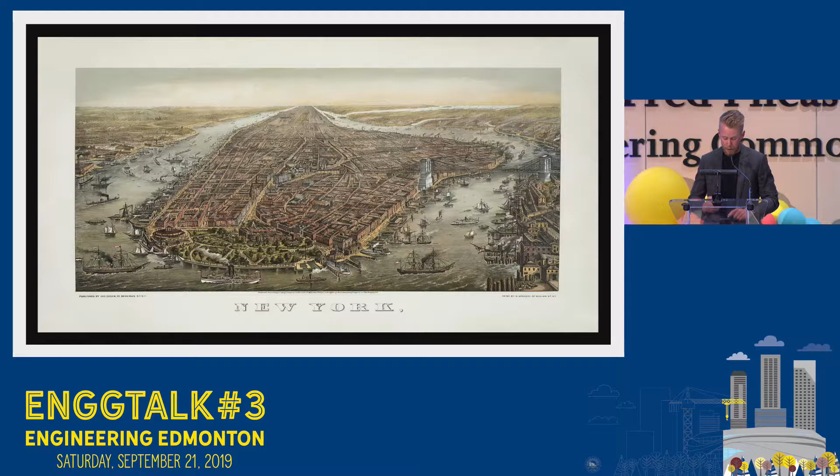Today, New York is considered the paradigm of urbanity. It became so strong because it attracted so many people throughout all its years. It is a city of creativity, a city of entrepreneurship, and it stands for freedom and cultural diversity. It invites everyone, it lets everyone come in, and people want to come in because they can start that business.

It is to remember, and was rebuilt after the destruction of the original World Trade Center complex. This is proof in New York's belief in itself and its sheer confidence. It essentially, with that one building being built, restored all of Lower Manhattan and really reinvigorated the culture within downtown and basically rebuilt the amazing city that was once crumbled.

Moving forward, I want to talk about Edmonton, the city of champions. I'm going to talk about a few different aspects of our city that I think are really important and huge in us taking that next step forward. One is our new communities - these big master plan communities and new neighborhoods around our whole city. I think they're a great aspect of our city, and they're very attractive to a lot of people.

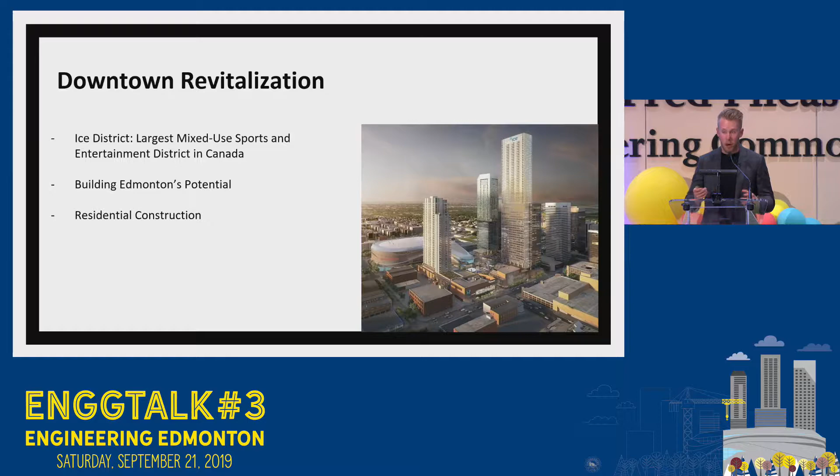A project I wanted to touch on under the downtown revitalization umbrella is this massive public plaza anticipated for the ICE district. I'm super excited for this one because it's finally a place in Edmonton where we can all, as a community, be together, interact with each other, and do basically anything. We can relax, meet each other, go for coffee. There's going to be festivals, concerts, programmable 365 days a year. It's going to be amazing.

When I went to New York City, Washington Square Park, if any of you have been there, I was very fascinated by that area because there were so many people doing so many different things, but all being with each other. Even though I was a visitor, I could feel the interaction, and I felt like I was there with everyone. I'm really hoping this is exactly what this can bring to our city, because I think it's perfect for what we need.

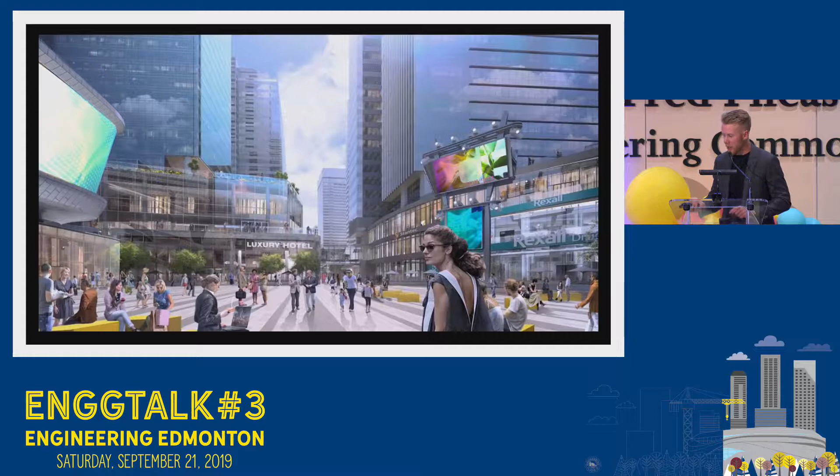Another little project I wanted to touch on — nothing set in stone, more of a concept at this time — is the High Level Line. Those of you who have been to New York, I'm sure you've walked the High Line, an urban elevated park that runs along old rail lines through the downtown core of New York. Amazing. Same idea here: a multimodal trail connecting the south and north of Edmonton.

Multimodal meaning you can take the streetcar, you can walk, you can bike, you can do everything. It's accessible to everyone — seniors, visitors, students, anyone can use it. It connects people to areas of our town that are already amazing, but makes them even more accessible and interactive. This is a prime example of innovating on urban spaces, and another example of something that could take our city to the next level.

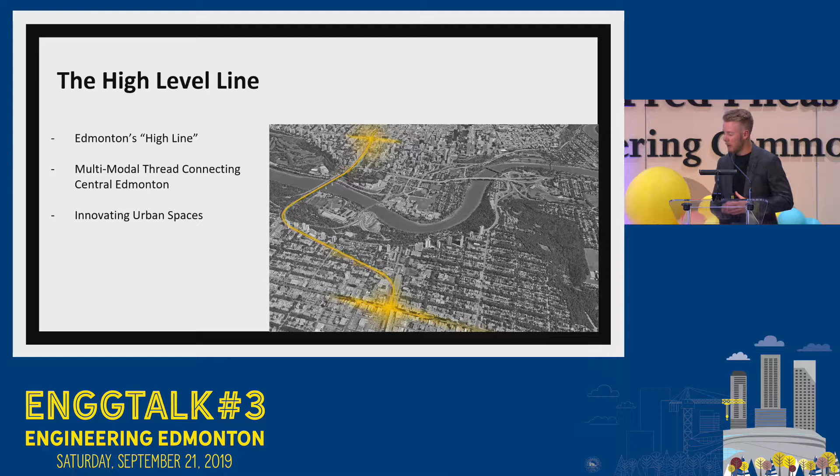So my last thought: how do cities succeed? This portion is from the book Triumph of the City. I like it because it breaks things down into two points. Number one, cities must attract smart and hardworking people — similar to how New York, when they were booming and business was moving, everyone was coming. Everyone wanted to be a part of it, and they were excited to be a part of it.

Having things like our beautiful new communities, our downtown ICE district, and cool projects we're building will attract these people toward us. That's why the engineers are so important, right? We need to build these things to attract these people.

Part number two: we need to enable them to work collaboratively. Once they're here, we have to let them engage, let them interact, let them innovate. As I said before, these are engines of innovation, and we need to let it run its process. There's no such thing as a successful city without human capital at the end of the day.

Our ability to connect with one another has been a defining characteristic of our species since day one — hunting and gathering together, sharing our kills, creating community and culture together, and learning from the past. We've always been with each other, creating things, and we need each other to innovate and make things better.

Another quote from that book, near the end, is: 'Our culture, our prosperity, and our freedom are all ultimately gifts of people living, working, and thinking together.' And this is ultimately the triumph of the city.

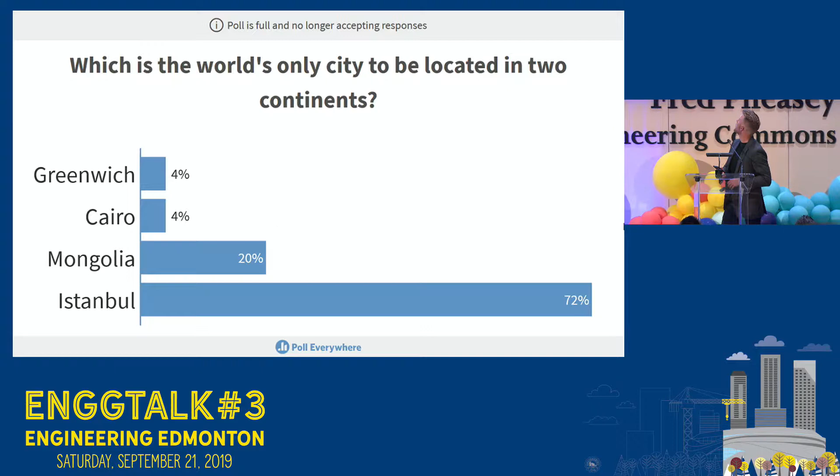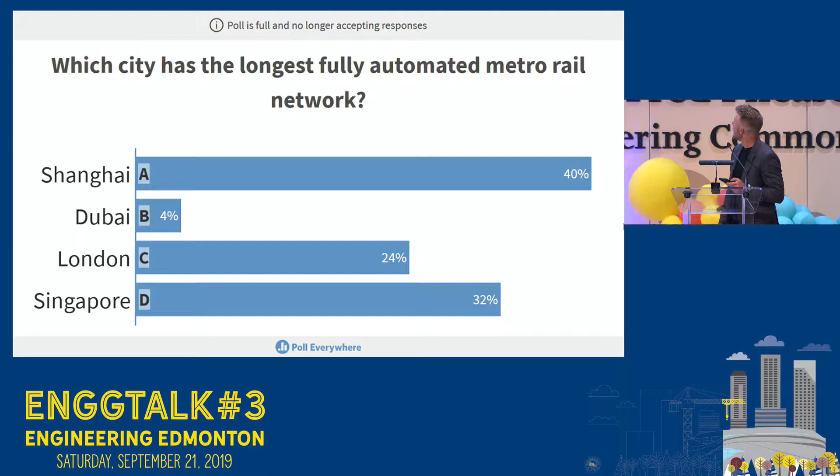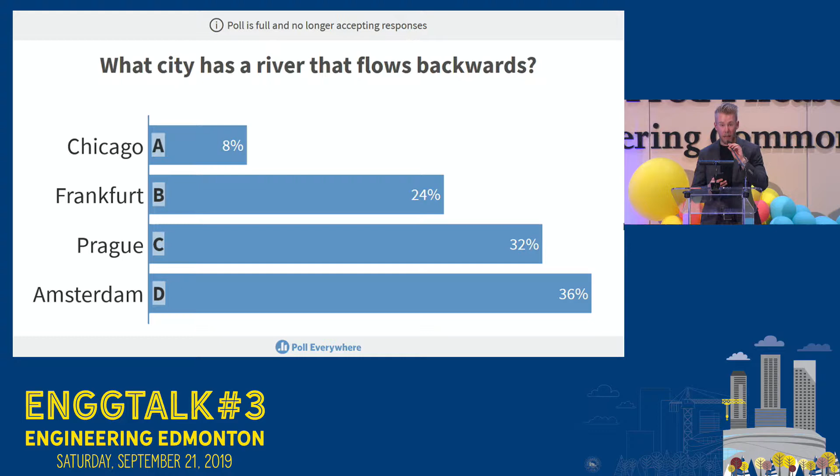Which is the world's only city located in two continents? Istanbul. Which city has the longest fully automated metro rail network? That one's Dubai, my God you guys. Which city has a river that flows backwards? That one's Chicago as well - they actually flow that river backwards to divert sewage from their water supply.

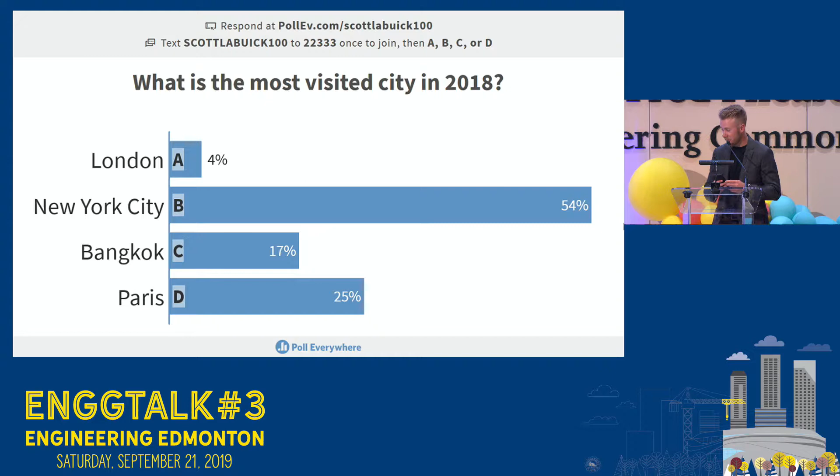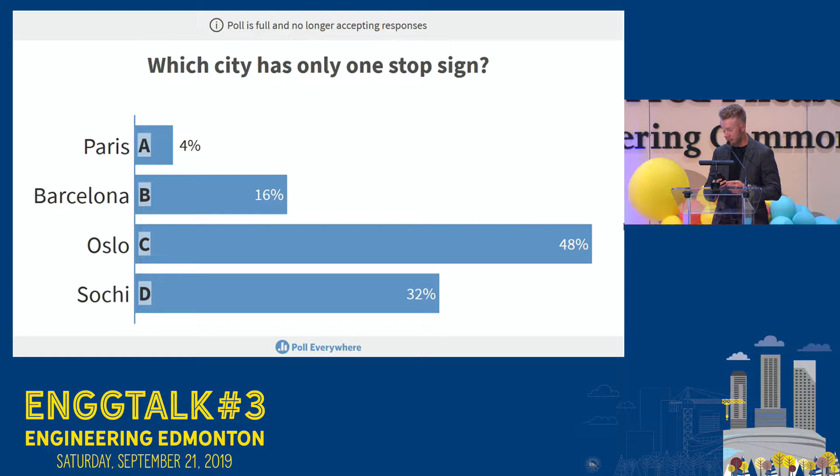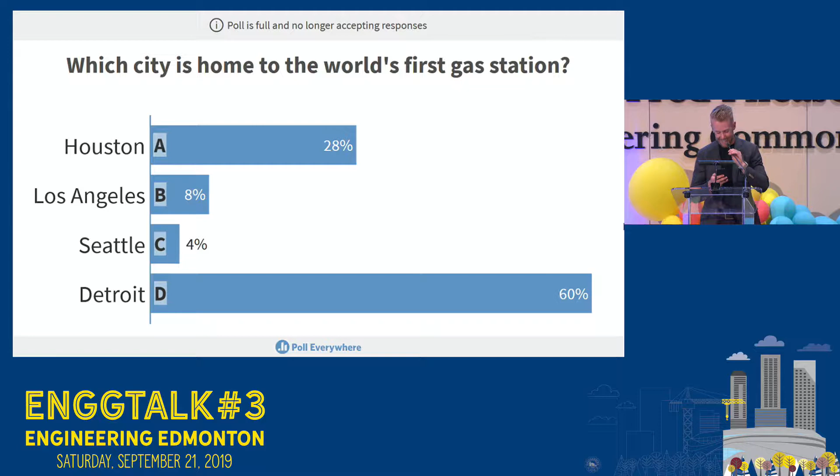Number 5, which is the most visited city in 2018? That one was Bangkok. Which city is the only one to have one stop sign? Paris - yeah, crazy stuff. Which city is home to the world's first gas station? That one's Seattle, wow, I picked great questions. This is awesome. Number 8, in which city was the World Wide Web invented?

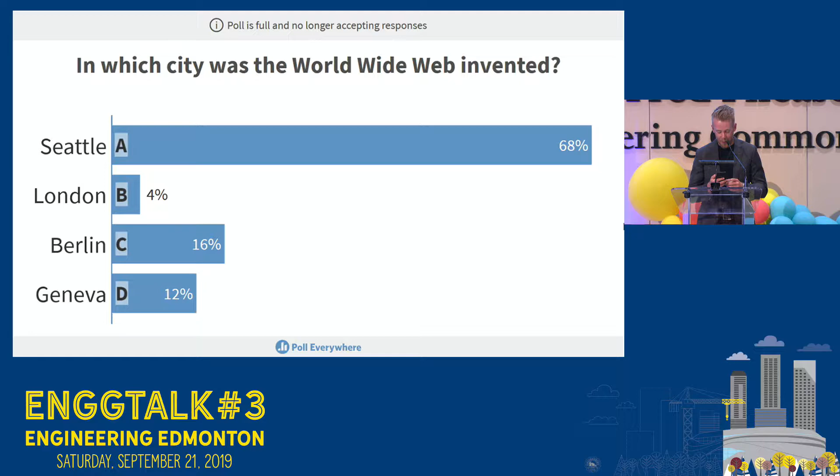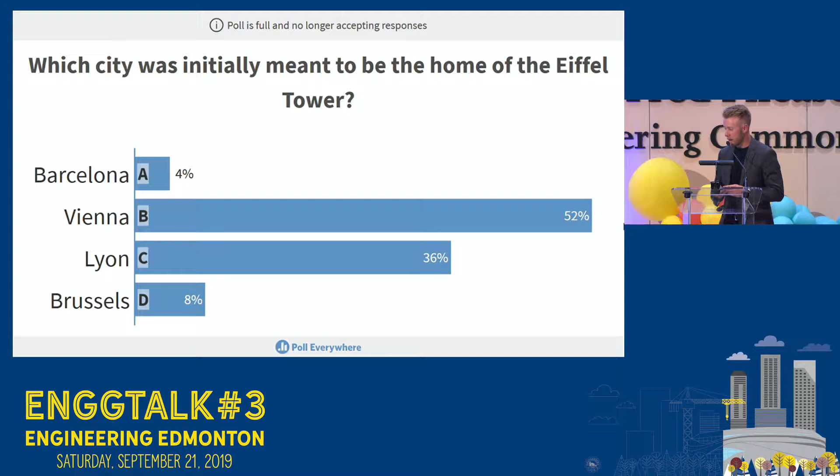That one was Geneva, yeah, I pranked you guys with the Seattle one, I knew it. Which city was meant to be the home of the Eiffel Tower? That one was Barcelona - they actually were gonna give it to Barcelona, but they didn't want it because they thought it wouldn't look good in their city. Bit crazy, I think it looks better in Paris anyways.

And number 10, which city is home to the world's highest streetcar bridge? That's Edmonton, okay, that's a good one, a good result, I'm satisfied with that. We all kind of pass. Okay, thank you guys, have a great night. Thanks for having me.

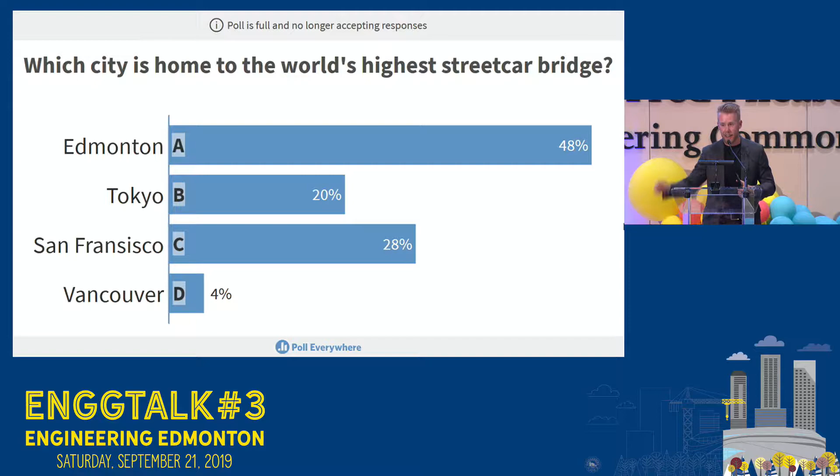Thank you so much, Scott Labuick, for coming up. I can confidently say that I know nothing about engineering, and I got all of those questions wrong. Those were very interesting and insightful ideas about the importance of cities, and it's definitely gotten me thinking.

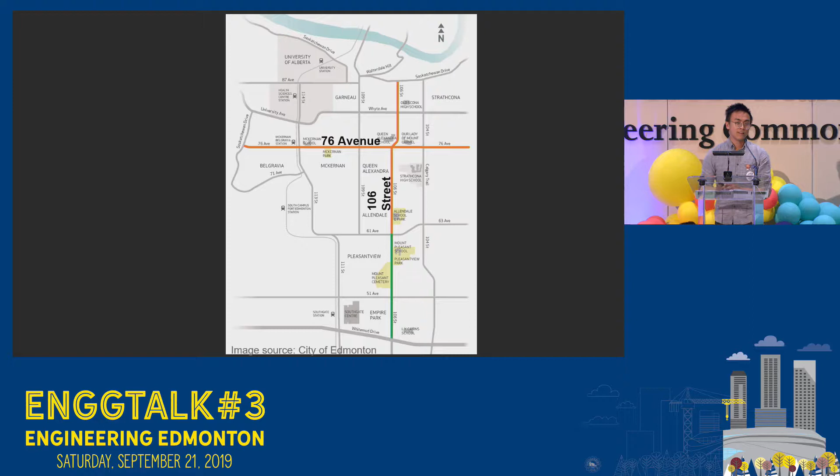We formed this project called Engage 10676. The project limit eventually got expanded to include 7 neighborhoods in total, taking a more holistic approach. We are a group of interesting people with different backgrounds—me from the city, representatives from 7 communities, people from local business organizations, and from the bicycle organization as well.

Together, we created the vision called Walk, Bike, Live. The focus of the project is to protect vulnerable road users and also to accommodate all modes of transportation.

We developed the engagement framework using a spiral process. Basically, we wanted our friends, neighbors, and parents at school to sign up as members of the project, and then asked them to share this project with their extended social network. Over 2 years, we received over 460 community members signing up for this project.

We used different kinds of engagement activities to get input, and one of the first was the online survey. We sent a survey to these community members, asking for feedback on how they walk, how they feel about walking, biking, living, taking transit, or even driving using 106th Street and 76th Avenue.

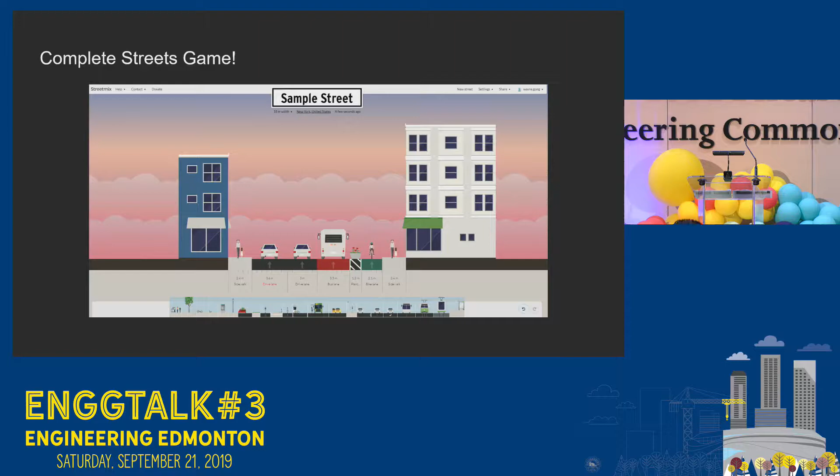I'm going to explain what we're playing here. There's a concept we call complete streets. What are complete streets? Simply, it means we design streets for all ages and abilities, no matter which mode they take.

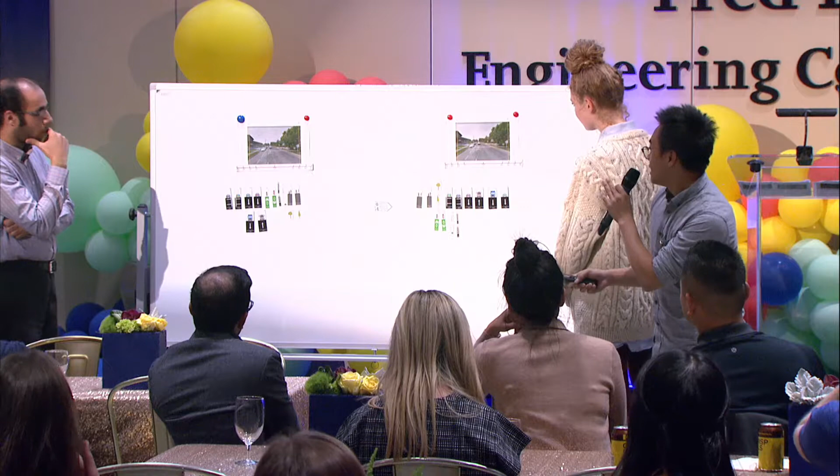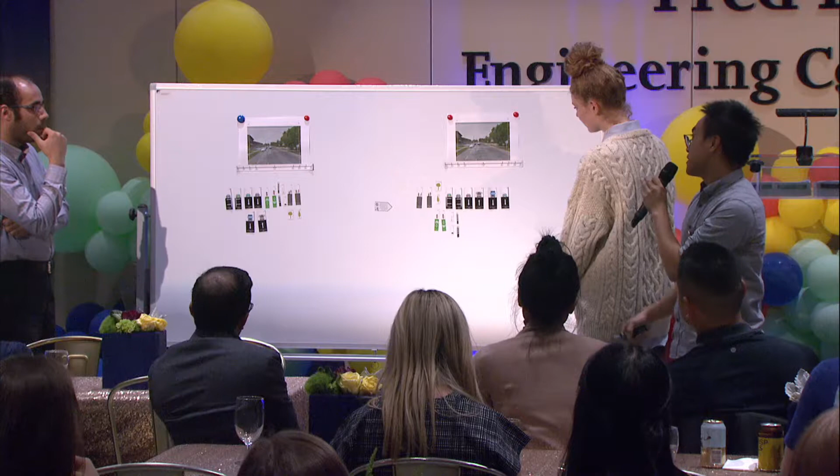Here we are seeing 2 pictures of the road cross section captured from Google Street View, from property line to property line. You will have different design street elements that you have to rearrange to achieve the vision that all modes of travel can be accommodated. You 2 have 2 minutes to finish. Go.

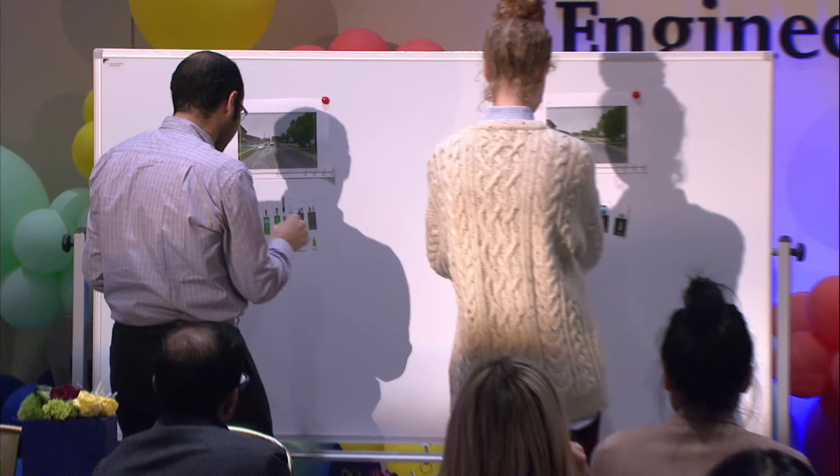Try your best to achieve the best outcome. All right, so we come back to the presentation.

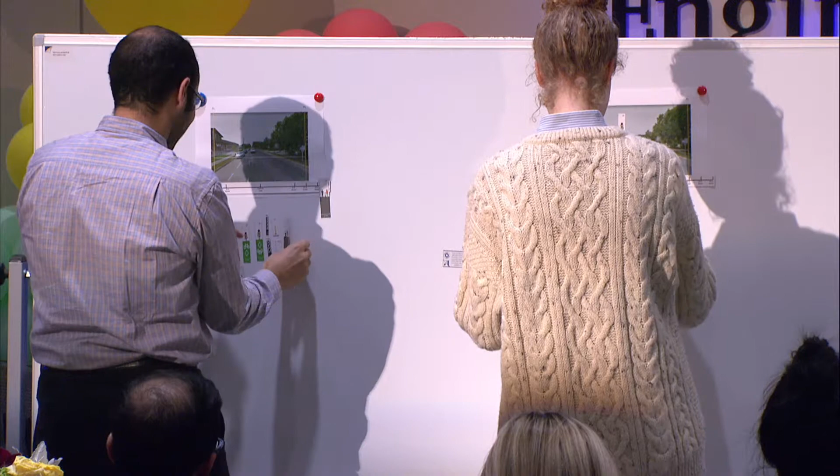All right, so while Victoria and Mustafa are solving the world-class problem, let's come back to my travel, and I'll share some of my inspiration during my trip.

And next, biking. The Netherlands is famous for biking. What I learned most is about the equity and accessibility they give to the users. No matter what background you're coming from, or what kind of physical abilities you have, there's a place in the bike route, and you can bike safely.

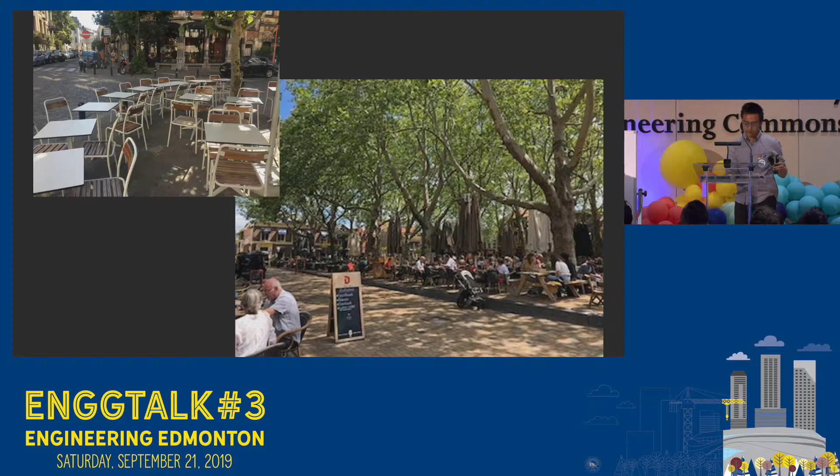This picture, what I want to highlight, is that in the Netherlands, because of their low car ownership, instead of building parking lots, they build this courtyard garden within the building plaza. This is a picture when I look out of my balcony in my B&B.

And the picture on the bottom, you can see they pay a lot of attention to streetscaping elements, like these flower beds, and also the decorated pavement surface. So the road is no longer just to move cars, but also for people to linger and enjoy.

And people tend to spend more time on the streets. In urban planning, we call these sticky streets, because they stick people.

Time's up. All right.

We weren't sure if this was supposed to line up with 20 meters. Oh yeah, the property line is from here to here, so I'm sorry. Oh, it's okay. Yeah, and there's no perfect answer, so this is to give you understanding on whatever decisions you make, there's a design trade-off. You cannot fit everything into a constrained road space. Yeah, I think you... that doesn't work. You can see.

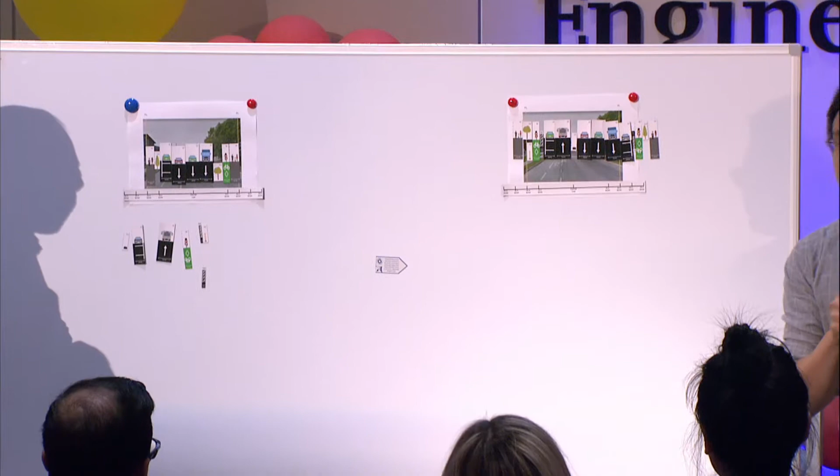Oh. Oh. Oh. Thank you.

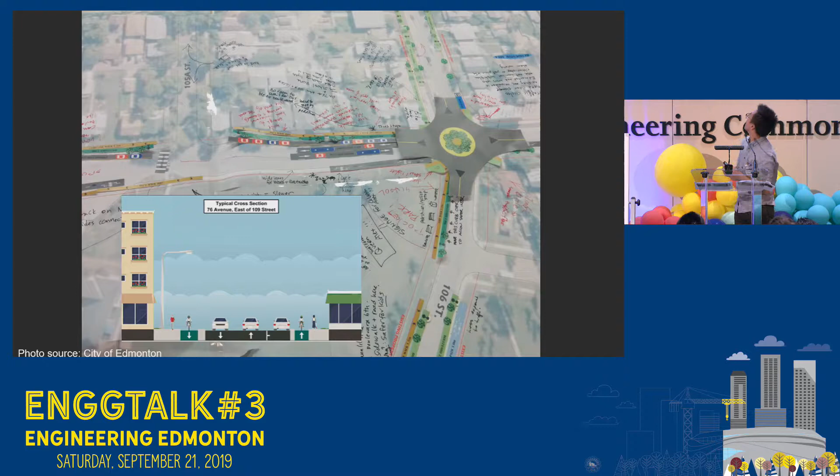Next, we refined our design and presented our preliminary design at one of the open houses. You can see there were lots of comments received, and it was identified that not enough pedestrian improvements were made in the design. That was partly because we couldn't even widen the sidewalk, because we have mature trees on one side we have to protect, and the other side has private streetscaping. We cannot just buy out people's land.

And then in the pre-construction open house, we put together a life-size cross-section highlighting how you're going to feel about this road space, how much space you will have on each mode, like bike lanes, and how wide the car lane is, so people have a better visualization of the changes coming in.

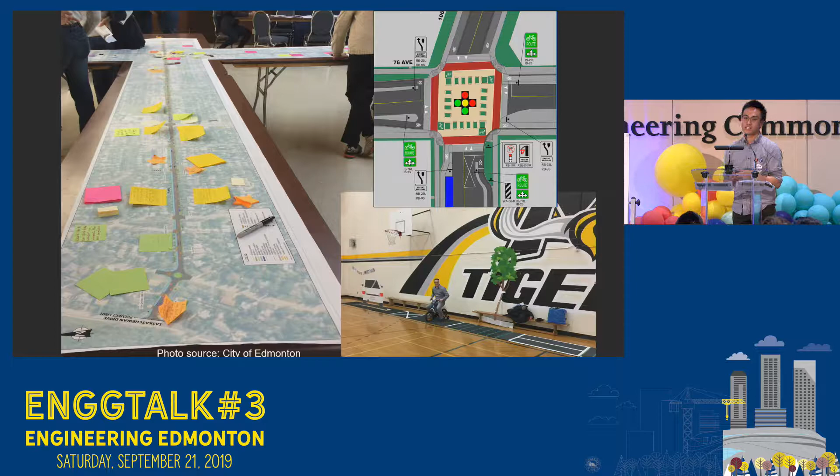And then it's construction season. There are a lot more challenges that we have to overcome, like making drainage accommodations, avoiding conflict with the underground high-pressure gas line. We also have to make sure all the local businesses have their access maintained, and we have to deal with all the detours.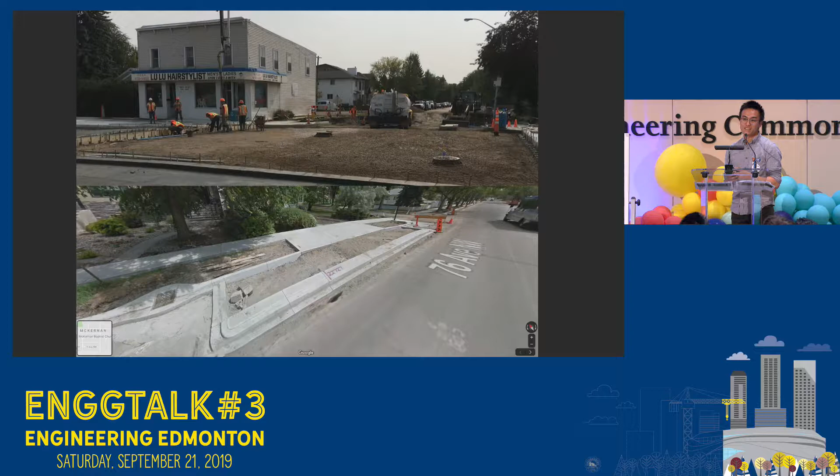Even more, we invited local residents to try out this bike lane when we had the survey stakeout. She brought her bike trailer to see, and we compared her travel path with our simulation model in the software.

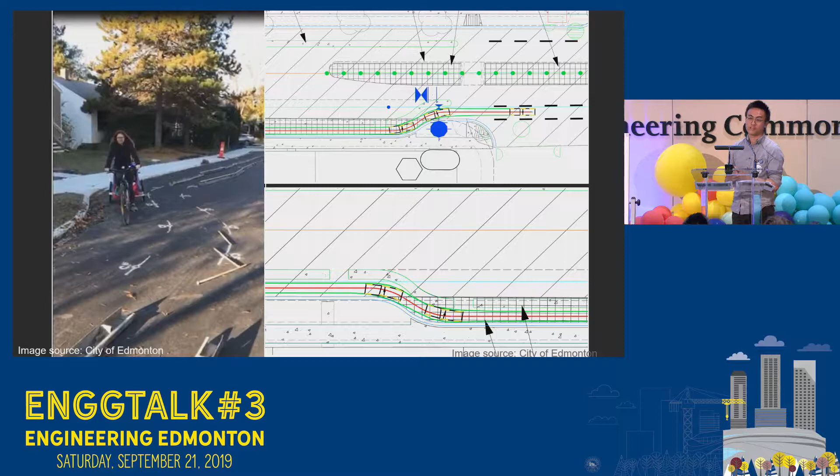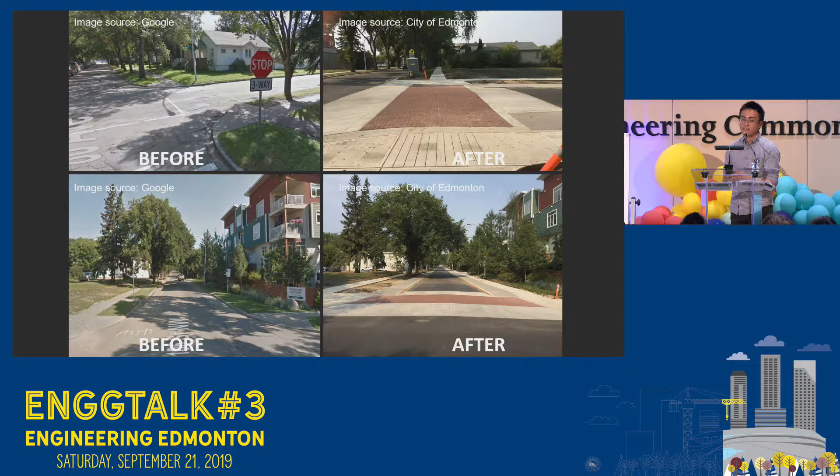And here's the final product of the construction. You can see a number of raised crosswalks are constructed, and you can find them near school areas or in areas where pedestrian traffic is high. So cars have to slow down to go over this raised crosswalk and also put the pedestrian in a more visible position. It is also aesthetically pleasing because they are decorated with paving stones.

In terms of bicycle facilities upgrade, the unprotected bike lanes now become protected with a median separation. The intersection is signalized and also has a two-phase left turn to facilitate a bike making a more safe turn.

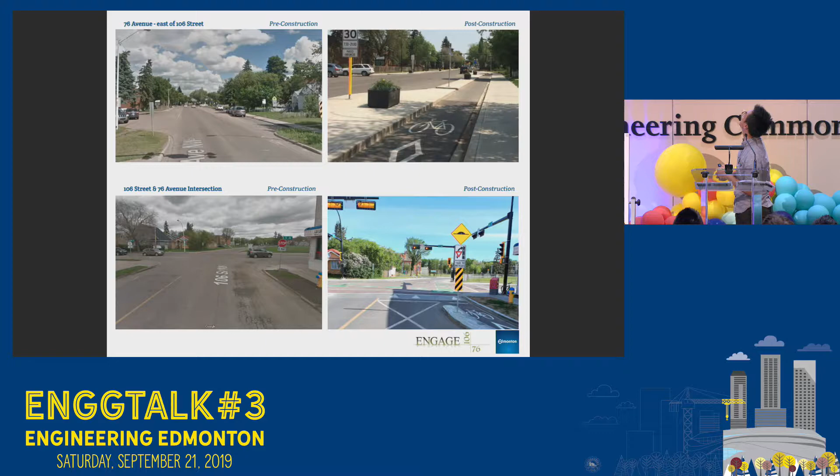We heard during engagement that parking is important to residents, especially for people with physical disability. To achieve that, we introduced a parking bay, and the protected bike lanes are deflected. This median gap not only helps the surface drainage runoff, but also improves the accessibility for people going from their car to the sidewalk, because the obstacle is removed.

And you can see it works like a charm in winter.

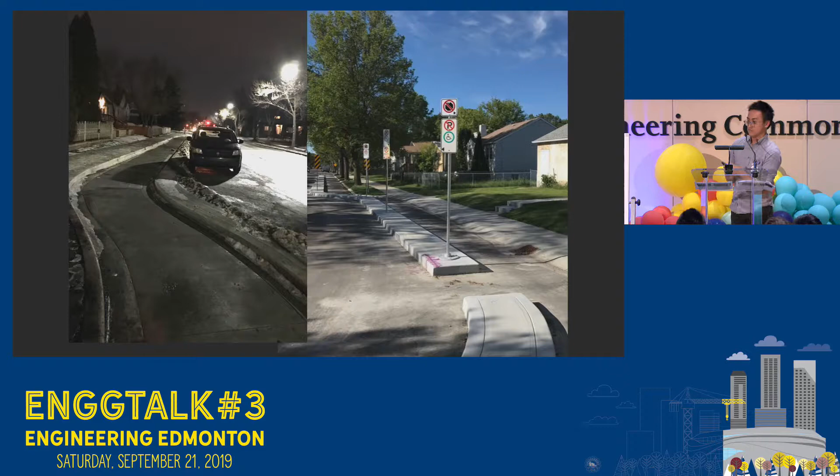In terms of livability, as part of the project, we have installed these decorated streetlights with a heritage arm to reflect the neighborhood's character and history. We also match the signal post style with the decorated streetlights, so you see a blue fluted pole on top. And also to maintain the diversity and the neighborhood's character, the rainbow crosswalk continued to be shown as part of the work.

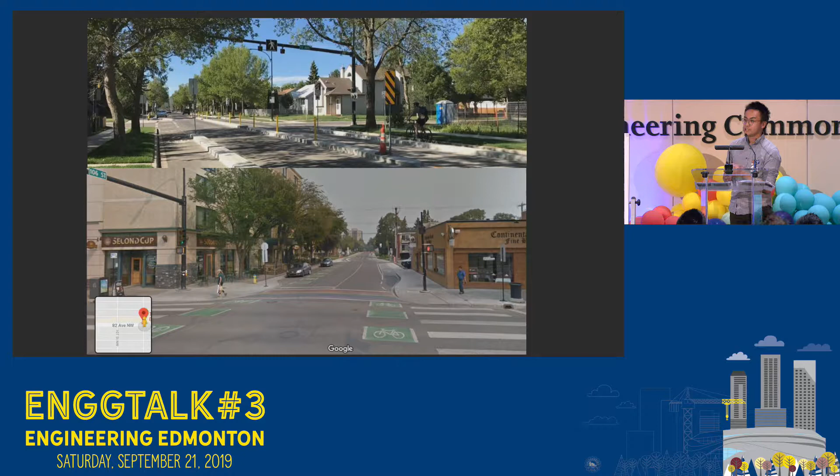And now all the physical infrastructure is in place. The next step is education, and how are we going to tell people to use this infrastructure.

So first, we have this bike-along program that our city cyclists would bring a group of people to try out these new facilities to get to know about the city. And also, we upgraded the bike map. It's available online, and we have hard copies in the library as well.

And since then, the city has attracted a lot of transportation professionals across the country to come visit and learn from us.

A picture is worth 1,000 words. And look at this kid. He's biking himself from school to home, or from home to school, I don't know. I just captured him one day on 76th Avenue. He was by himself, but imagine the level of independence and freedom he experienced. It's comparable to us when we first got our driver's license, but at a much younger age.

Since the completion of this 106-76 project, the pilot engagement has become the standard for the city to roll out this engagement process. And we even go above and beyond. Now, public space renewal has become part of the neighborhood renewal scope, so now we look at renewing parks and playgrounds.

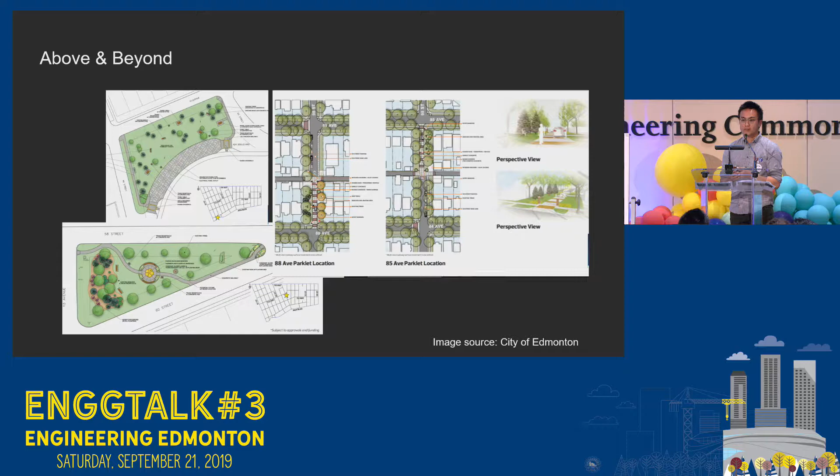There are still challenges, and we know not everything we build is perfect. Like we heard, there's concern about the buses making turns at the intersection. So we make tweaks after construction, and we also simplified the number of signage that we see on the road, and improvements are still being made.

I want to address that as cities' population is growing and urban density is increasing, our physical infrastructure needs to evolve to accommodate the fact that, to make our city a better place to live, people have a choice of their transportation mode. And as transportation engineers, or even as engineers, we need to be innovative. We need to have the view to challenge the status quo and to be part of the change movement.

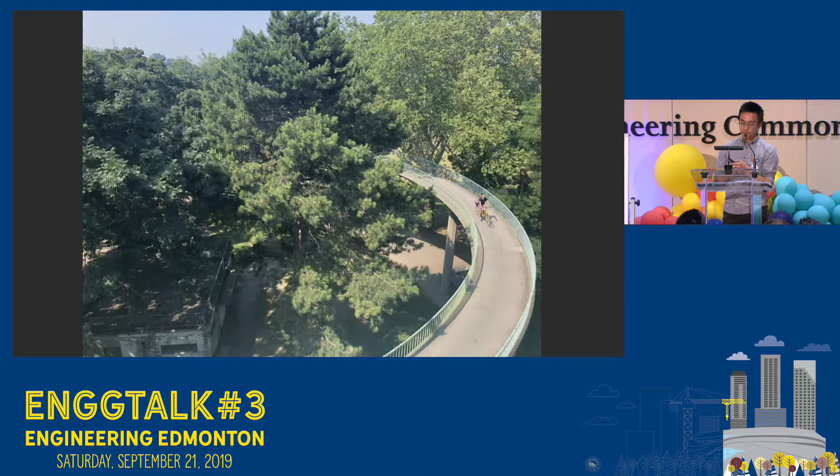Thank you for listening. I'm Wayne Gong, an Edmontonian and transportation engineer. Thanks.

Thank you very much, Wayne Gong, for your very interesting speech. Thank you very much to Tori and Mustafa for joining in our little game. And that's just crazy how confusing and thoughtful you have to be, thank you very much, just to find a solution to a simple project such as a street revitalization.

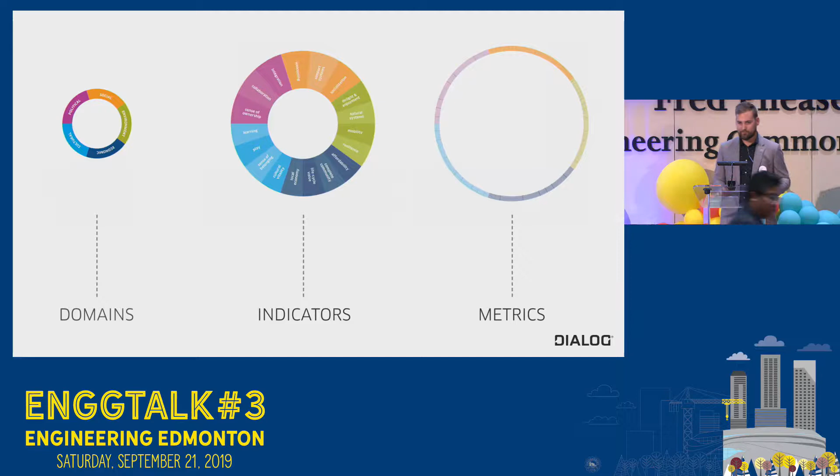So like I said, there's 5 different domains: environmental, economic, cultural, political, and social. Within those domains there's 18 indicators. And outside those indicators are a whole bunch of metrics, which are essentially the checkboxes and measurements that you can take to figure out if you're actually making the community a better place, or if you messed up and maybe you're not making the community so great. But at least you know.

So how do we implement the framework on a project? Well, it depends on the project, and it can vary based on the nature, extent, and depth. But in general, we follow these steps. First, you define the project. Is it a detailed mechanical systems upgrade, or are we managing the urban growth of a city? It's scalable. Then you engage the stakeholders.

Designers and engineers don't have all the answers, and we're not the smartest people in the room. So it's really, really important that you get and find the people who are going to be impacted by the project and get their opinion. They're the people that matter, and they're the people that are going to have the best ideas on what the project should be. So you want to elicit the participation of a wide variety of perspectives.

Then you establish a baseline. You got to figure out where you're at before you know where you're going, and if you actually even made a difference at all. Establish targets — so develop your targets early, and focus a conversation and advise the development of different options.

And then communicate. You got to talk. Participants need to feel like they can voice their opinion safely, because they're not all designers and engineers in the room. You're going to have a whole bunch of different people. And then employ the metrics.

So throughout the design, decisions should be informed by how they perform relative to all the benchmarks. Use the metrics as a guide to figure out what's going on. And then record it and document it so you can actually go back and see if you made a difference. As an engineer, I like this implementation — it sounds a lot like an experiment or a lab test. It's logical and methodical, and it's a way to organize the metrics that are otherwise maybe difficult to articulate and really difficult to measure.

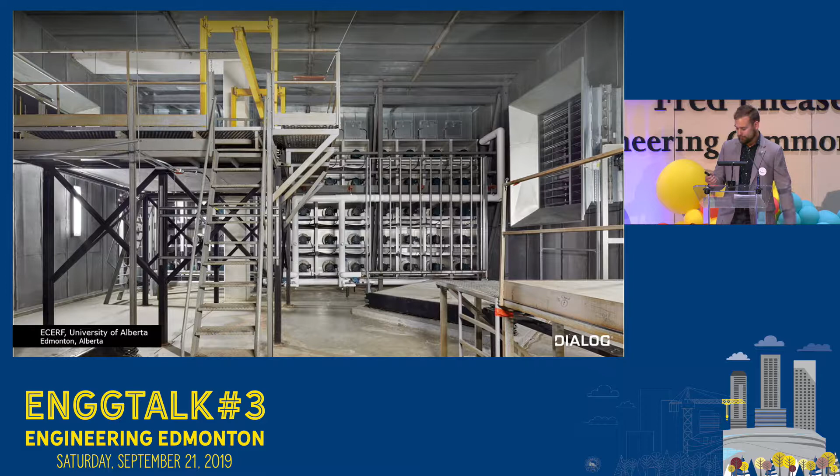Okay, next, I have a fact for you. Employees with views of trees and natural landscapes take, on average, 9 less sick days a year compared to people that don't.

So another important metric to figure out if you're impacting communities positively is about nature. Has a biophilia plan been developed for the project, and did we maximize human-nature interactions?

So there were quite a few engineering decisions that made an impact on this space in particular. The first being drainage, right? So this whole garden is actually enclosed by a building. How do you drain the snow out of there? How do you make sure that water isn't pooling in places where you can't use it?

The second was the lighting that we put in the space. We really wanted to make it people-scaled or human-scaled so that it didn't feel like you were in an institution. It felt like you were in a park, hanging out and relaxing.

The other thing too is that this is still inside a building, so we had to deal with exiting requirements - fire alarm stuff and making sure that people can actually get out if the building's on fire. And as an added bonus, all of the windows in the building facing the courtyard actually look into that park. So not only are you letting people spend time in a park, but a lot of the people around and surrounding it can see the park and see the nature.

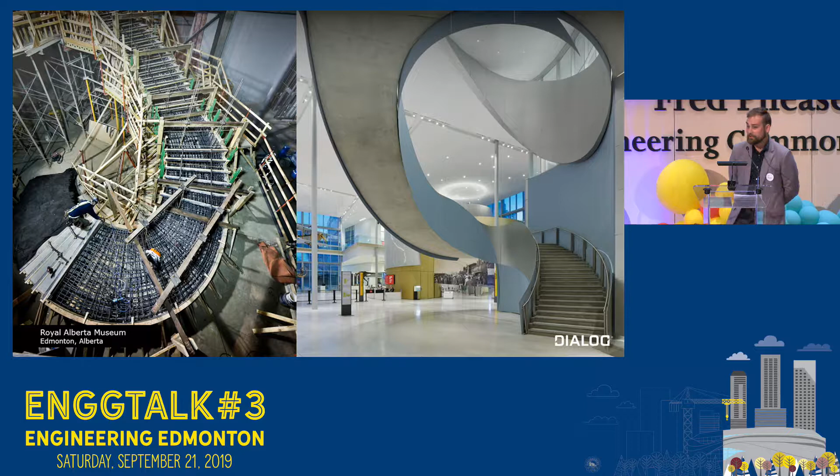This is the first family day that the museum was open. I'm pretty sure the structural engineers had that in mind, and it was designed that way so that many people could use it. It would have been way easier just to strap a stair over here and have people go straight up, and it probably would have cost a lot less money, with a lot shorter days at the office. But then people maybe wouldn't have taken it as much. I bet everybody on this stair right now has no idea where the elevator is - they just saw the stair and decided to go up it.

Oh, these balloons. Okay.

Next, economic domain. So can your community afford the services that your project's providing? It doesn't make sense to build a Michelin star restaurant in a community that can't afford it. And likewise, it doesn't make sense to build a really expensive net zero building if it's just going to sit vacant with no tenants because rent is too high, right?

So a strong engineering impact in the economic domain could be a life cycle cost analysis, which I'm sure every engineer is going to do at some point in their lives. So does the return on investment for the development of the space account for the ongoing maintenance?

So an easy example, like an LED fixture, on average lasts twice as long as a fluorescent fixture, but it costs more, right? So we need to account for the additional replacement cost of the fluorescent fixture lamps and compare it to the LED over its life - the LED wouldn't need to be replaced as often. So you have to look at the whole picture, and at the end of the project, figure out which one ended up costing the building owner more.

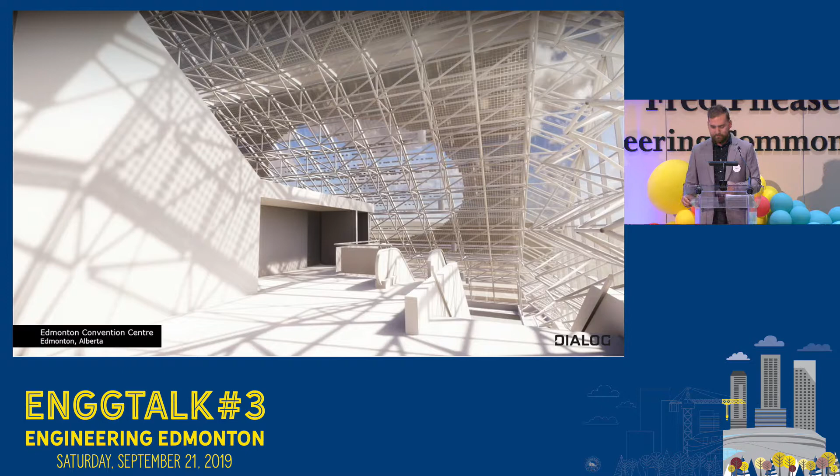From a purely engineering standpoint, it probably would have made more sense to fill that up with PVs and just generate more electricity, right? But you've got to balance everything out and realize that maybe putting some art in here is going to have more impact on the community.

Giving people of all ages an opportunity to learn and develop is integral to a healthy community. At the TELUS World of Science, we provided a full spectrum LED light to help their plants grow.

People of all ages are attracted to the bright white light and the colorful plants, and they go take a look, and it's really cool. They even put some labels on what herbs have been planted and things like that.

But we wanted to take the sense of learning one step further, so we actually engineered some color-changing controllability too. Now it gives the kids and anybody in the space an opportunity to do more experiments—do the plants grow better under red light or blue light? It's a little bit more curiosity and learning.

I worked on this project as well, the engineering garage. Think about all the amazing things that will be built in that space. Our team came together to design a space with ample flexibility to support all kinds of learning, exploration, and development.

Have you guys heard the story of Mason Thomas, the boy who had a heart transplant? Did you see it in the news? If you haven't, after his complicated heart transplant, he wanted to understand a bit about what happened, and so the faculties actually teamed up to 3D print his heart on the PolyJet printer. He also wanted it connected to a TIE fighter too, which is kind of cool.

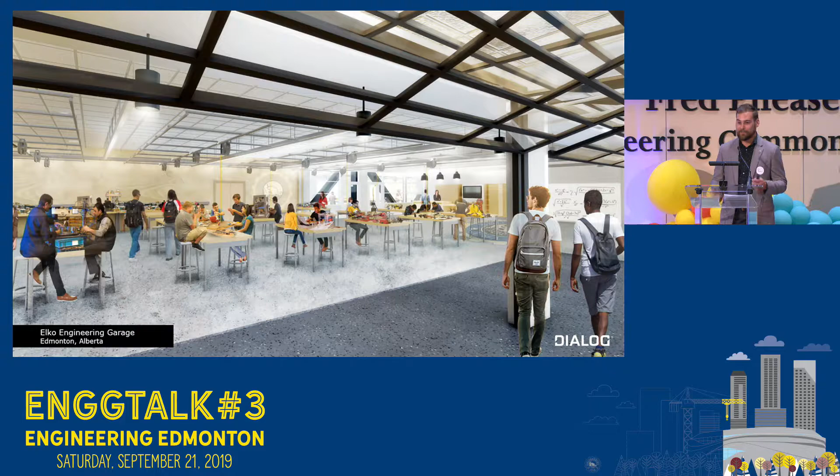If you haven't seen the story, look it up—I think it's on the Faculty of Engineering Facebook page. It kind of pulls on the heartstrings a little bit.

The political domain. This one is a little bit misunderstood, but in general, you want to make sure your project gives people opportunities to contribute to their own well-being. Can people understand, control, and transform their own environment? Were people given the opportunity to collaborate with the project team? Was it designed for them? It's the difference between a house and a home, or maybe a sense of ownership.

I'll go back to this example at the TELUS World of Science Cafe. During the design, we made an effort to include all the stakeholders from day one—maintenance personnel, marketing, programming, chefs, event coordinators, everybody. We had a fully integrated team of professionals: engineers, architects, designers, everybody.

We really wanted the Science Center to be proud of their space and feel like they owned it and could do with it as they please. So they can reprogram the lights, move furniture, and the kitchen was designed with enough flexibility to provide a wide range of rotating menu items.

Okay, last one, all the way around: the social domain. Do people feel welcomed, safe, and engaged? Regardless of their background or physical ability, are there appropriate spaces to socially hang out and engage?

I have another fact.

Did you know that seniors, on average, need 4 times as much light to read the newspaper as someone under 25? So it's really important to a designer, or in this case lighting design, to know who's actually going to be using the space. You've got to think about that.

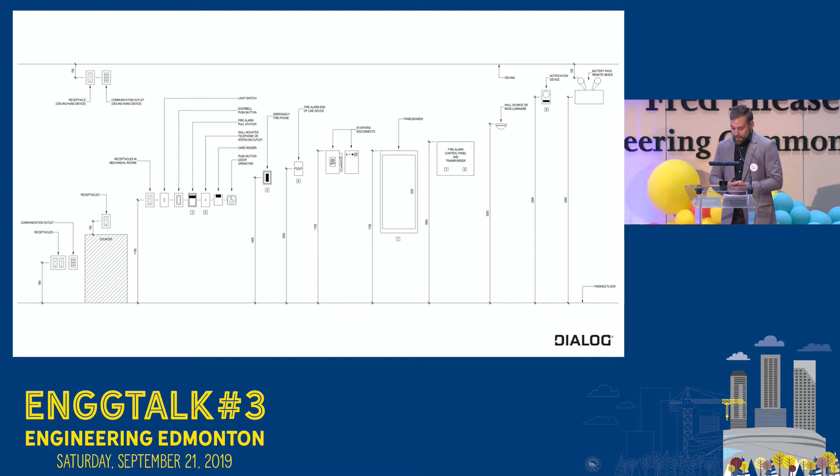We have this detail on all of our electrical projects indicating the height at which devices should be mounted in a building. On the left side, you can see our receptacle mounting height, which we've raised up a little bit to barrier-free standards. Our light switches we've brought down a little bit also to barrier-free standards. So if you're in a wheelchair, it's going to be much easier for you to plug something in or turn the lights on and off. This is a detail we put on all of our projects.

So a simple, small change like that can make a big difference. Lastly, on a bigger scale, you've got the Mechanized River Valley Access Project. This one touches on tons of the aspects we've talked about so far. You can give people places to sit and interact, get in touch with nature, take the stairs, and those who can't take the stairs can take the inclined lift. It's free to use, so there's no cost. We're able to improve the lives of those who can't get around, and you can even measure how many people use it every day, which is pretty cool.

Okay, so we've gone all the way around the wheel. I've shown you a glimpse of how an engineer can impact communities with both small and large decisions on a wide variety of projects. I talked about buildings, but this can be scaled up to cities and places. The decisions we make as engineers have an impact on the community, and it's so easy to get caught up in the math, diagrams and codes, but every once in a while you've got to take a step back, look at the bigger picture, and see what the impact of your work is. The framework we talked about helps us understand what that impact is and helps us design for community well-being in a holistic and integrated way.

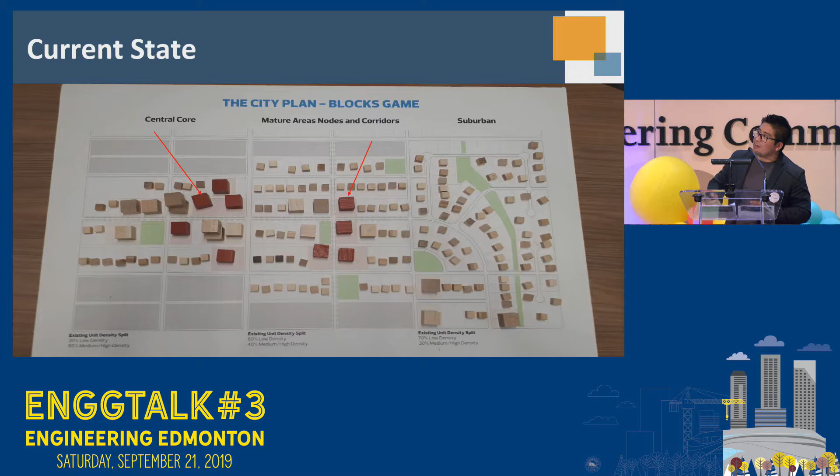The red blocks are showing commercial, jobs, or institutional areas where people go on a daily basis. The larger, whiter blocks are medium density housing. If you stack them together, you have high density. If you have two of the small blocks together in one lot, that's more of an infill or row housing. And if you just have one block on one lot, that's more your low density housing.

This is a very big exaggeration. I know that there are jobs in the suburbs and things like that, but it's just to show how typical North American cities look, and Edmonton is no different. So this is kind of the current state that we have, and I'm going to use this as our quick interactive portion of the presentation.

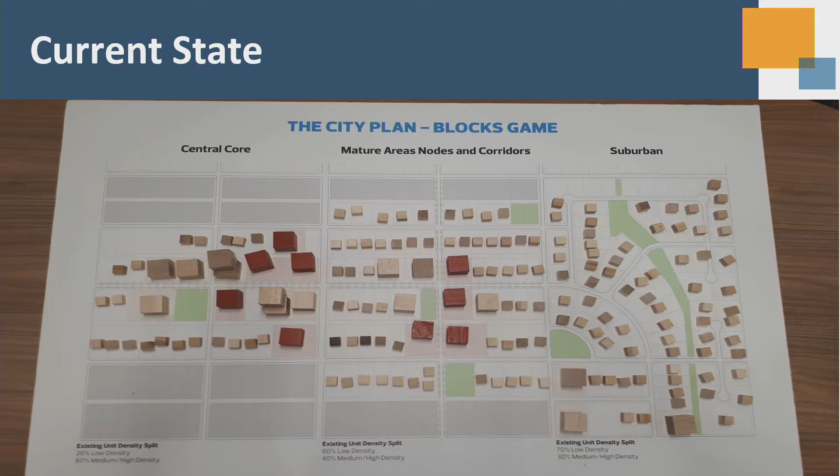So my first question is, how do you believe travel patterns are in these different parts of the city? Where are people going from the suburbs, the mature areas, and the central areas, based on where you have the people and where you have the jobs? I'm going to do a quick poll based on how I've described it. Who lives in the suburban areas?

Okay, I'm going to pick on Hannah because I was talking to her before. You don't have to say anything, I'm just going to ask her a question—you can just nod if you want. So on a typical day in the morning, let's say, do you usually stay in the suburbs, or do you go into the mature areas, or the central core? Central. I see you nodding that you don't stay in the suburbs.

And that's very true of people who live in the suburbs. They travel more to the mature areas where there's jobs, and a lot of times they come down to the central core to study, to work, or to have fun.

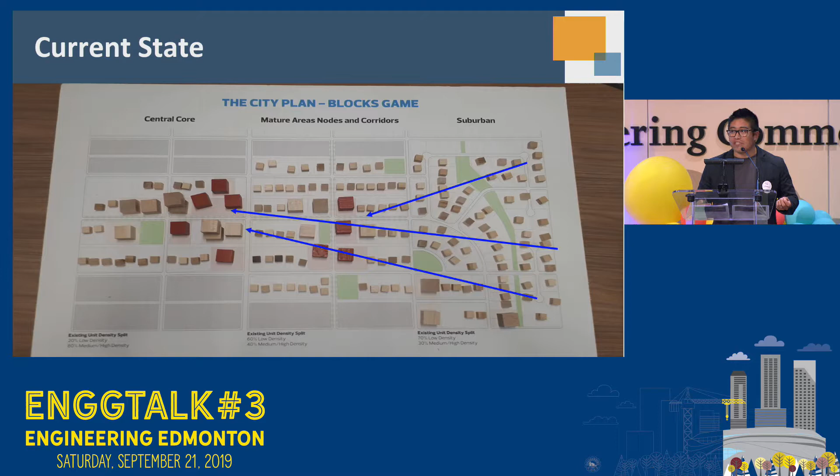Who lives in the mature areas? Okay, you're closest to me, so I'm going to ask you. More or less every day, do you stay in the mature areas? Do you go to the suburbs? Or do you kind of come downtown?

Okay, so again, your travel patterns—no one's going to the suburbs. So you can really start to see how you're creating one flow in one direction, and it's kind of like a funnel. You're trying to grab a lot of people and put them down these narrow roads. And what happens when you put too much into a funnel? You get backup, you get congestion. So you start to see some of the problems that we have, or can have, with a city like this.

Not only that, we could provide transit, but everyone is so sparsely located that it's not efficient, so we just aren't able to provide that. That would be a solution, but because we have this urban form, it's not something we can use.

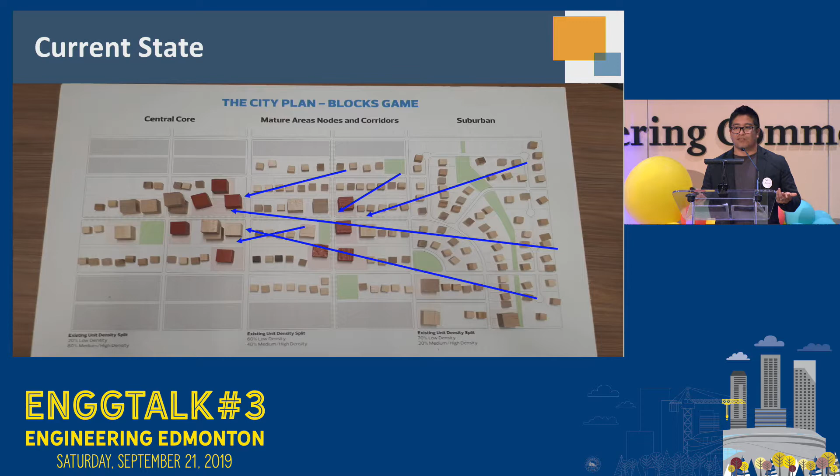And now who lives in the central core, downtown, Whyte Avenue? Carrie. Do you mainly stay in the central core? Do you go to the mature areas, the suburbs, on a daily basis? I know you might do some trips out there, but what's your travel pattern like? Yeah, I mean, I prefer to stay in the core. I thought I preferred suburbs, so it's a bit of an anomaly. So you're an anomaly, yes, because I'm going to show you right now.

Most of the trips, most of the people in the core, they're able to work there, study there, and have fun there. So just the length of the arrows is very telling—as you can see in the suburbs, the lengths are longer, meaning trips are longer. In the core, the arrows are shorter, meaning trips are shorter. Shorter trips are usually taken by walking, biking, transit, or scootering now, as opposed to driving—it's just that much more convenient. So keep these travel patterns in mind as we go through the next slides.

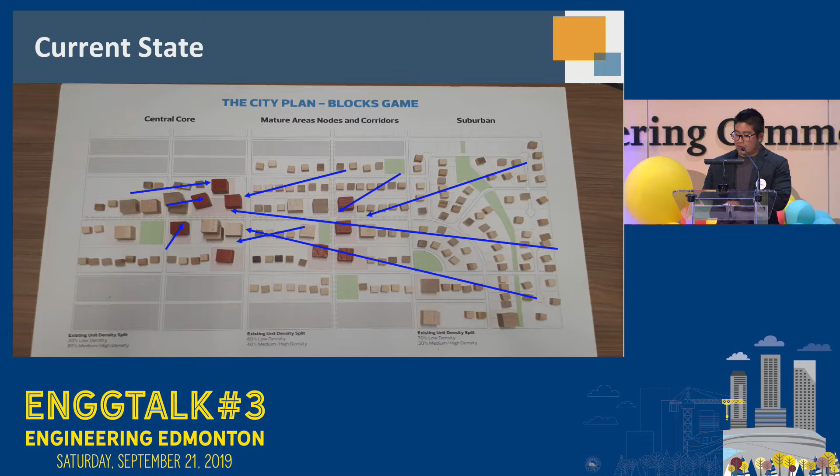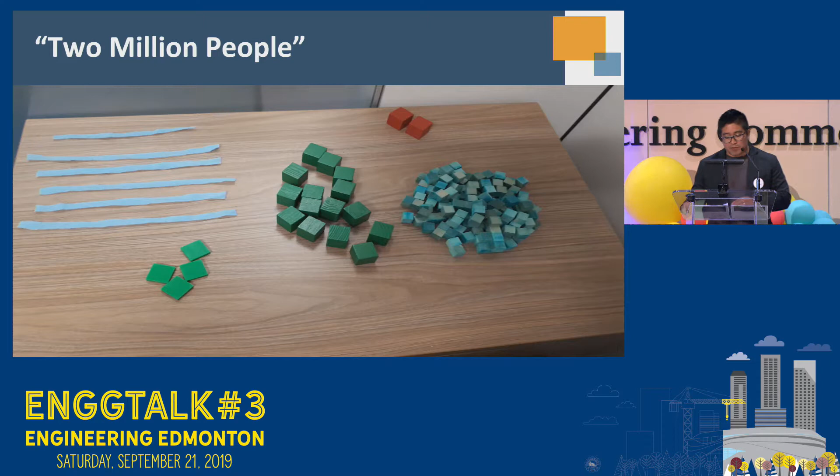So one way we could grow is business as usual, growing the way we've always grown. In that scenario, we'd still put high-rises downtown, infill quite a bit in the mature areas, but we can't fit everybody there. So we start growing the suburbs, and eventually you literally have to go off the board, expand or go elsewhere.

So if I ask what the travel patterns are, they're probably still the same, except worse, because you're creating much more people outside. And we haven't put all the benefits in—a lot are still on the table. We've missed out on adding a lot of benefits that we could have if we grow a different way.

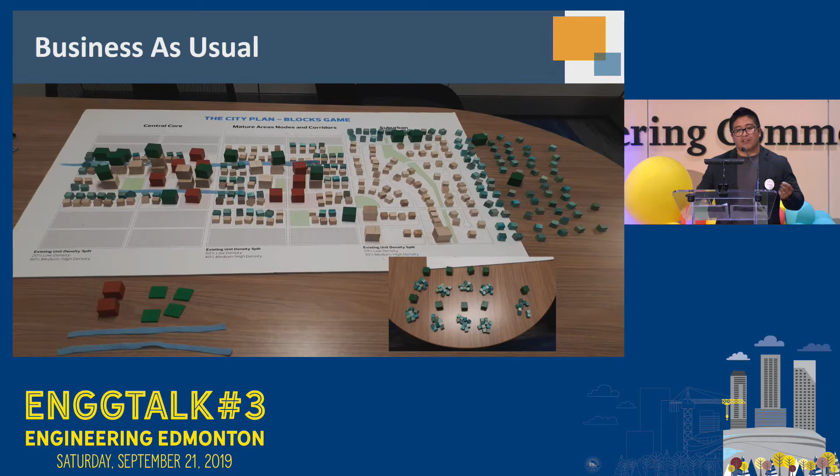So the first learning is that we need to do something different—grow in a different way. We need to condense a lot of those small blocks into larger blocks. In essence, we need to densify. And that's exactly what we did: we took a lot of those little blocks and made them into larger blocks so we can fit everybody into the city.

Another way to grow is what we call a centre city. You put everything downtown—it becomes high-rises everywhere, everyone lives there, with some infill in the mature areas. But by doing this, you leave the suburbs alone, not changing that much there.

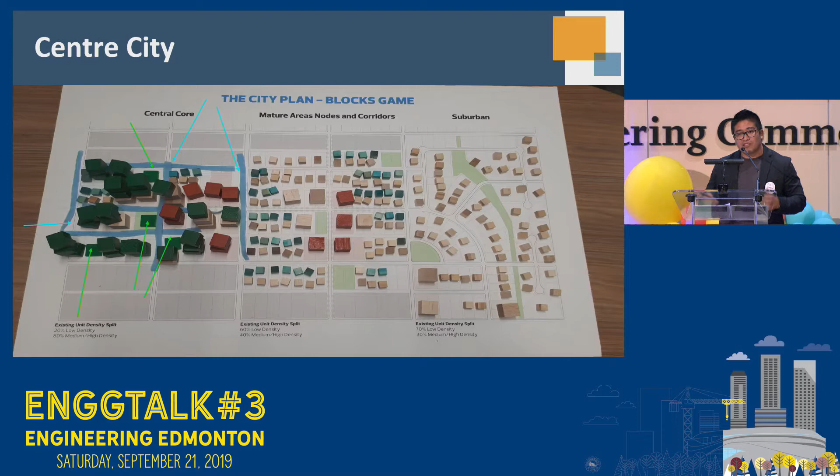Now, as you can see, we've added all the benefits—frequent transit, park spaces—but they're all downtown. I didn't show it, but you also have extra red blocks, so you brought more jobs in. You've captured all the benefits, but they're all downtown. So the travel patterns in the suburbs are probably still the same—nothing has changed that much.

In the mature areas, because you've added people, maybe you have more travel, and not everybody's coming downtown, but for the most part a lot of people are. As you can see, some areas start to go bidirectionally, and you haven't lost the benefits downtown—people are probably taking a lot more trips, just a lot more people doing that. So the second lesson is that having a central core allows more people to live and work in one area, opening up other options to move around.

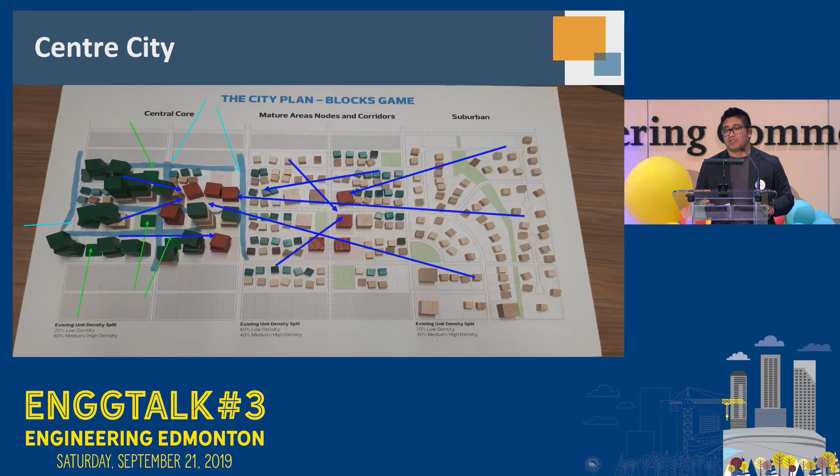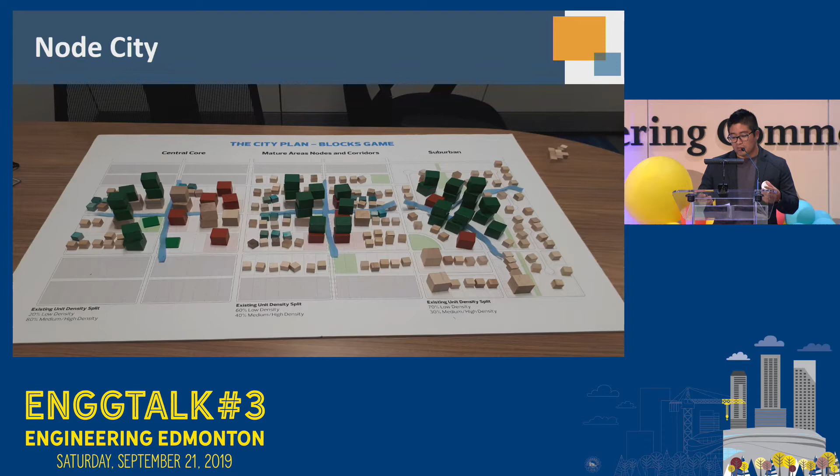Using that learning, we can also build mini downtowns in each part of the city. You still have a downtown in the core, but you can have these nodes, as we call them, in the mature areas and in the suburbs. In this scenario, you still have all your benefits, except now you can afford high-frequency transit in each part of the city, and you've also provided park spaces in each part—so the benefits start being more equally distributed.

More importantly, we've added red blocks into the suburbs, so now we have the ability to add jobs, industry, places people want to go on a daily basis. We can influence people's travel behavior. Now not everybody is coming downtown because you have these mini downtowns in those areas, so people might want to work there. You might still have some trips coming to mature areas or the central core, but for the most part, you can create that type of travel pattern.

So this just shows another travel pattern, or another urban form, that we can follow. If we spread out the growth in a more dense way, we can pass on the benefits to more of the city. By changing the way people live and work, putting them more together, you can disperse travel patterns and have a much more efficient transportation network. Instead of everybody going one way in the morning and the other way in the afternoon, now you have bidirectional travel. So those roads that are sitting empty, you're using them more, and you have high frequent transit so you can move more people. You're really having a network-wide effect on your transportation network.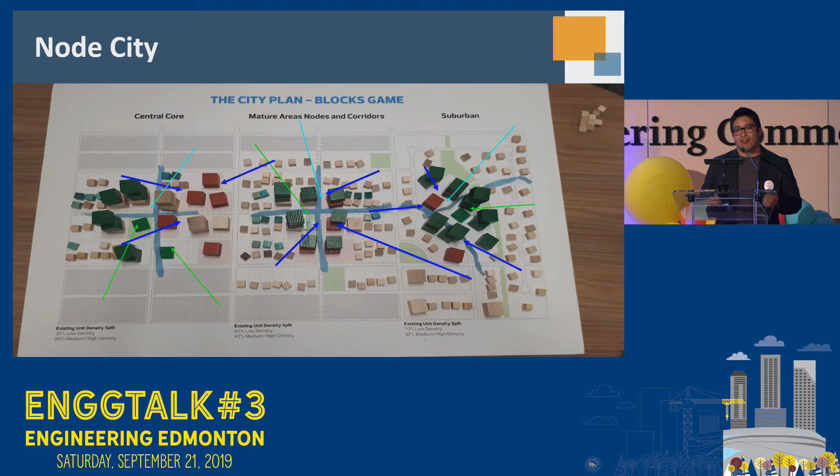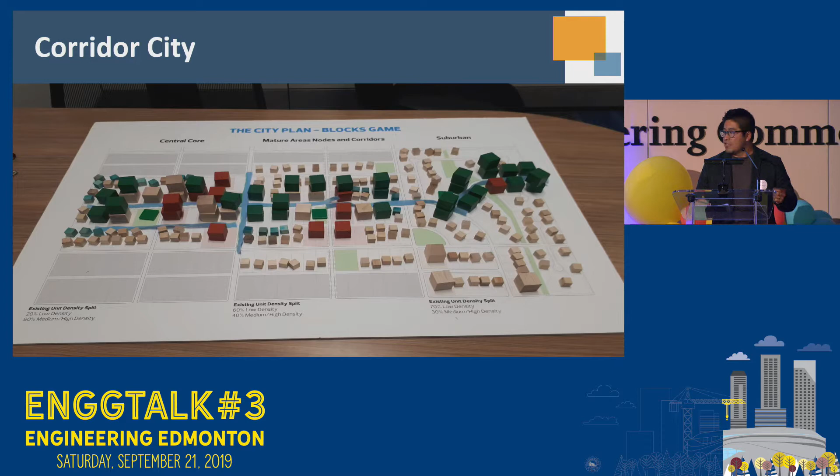The third option we could follow is a corridor city, so not many high-rises, more medium density along key avenues, spread out in each part of the city. You have frequent transit in each part of the city, and you've kept your park areas in each part of the city as well. Your travel patterns stay the same - for the suburbs, in the mature areas, and downtown. But what's particular about this example is that the arrows are all pointing to that avenue where you have all that density. If you know people are traveling along there, you can provide very good efficient transit. So that's another learning, that if we follow that type of development, we can capture a lot of transit.

So now my question is, what is the correct way to grow a city then?

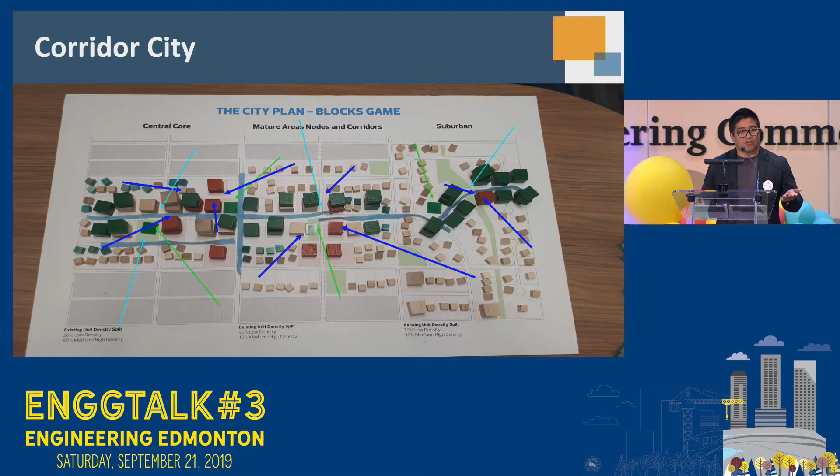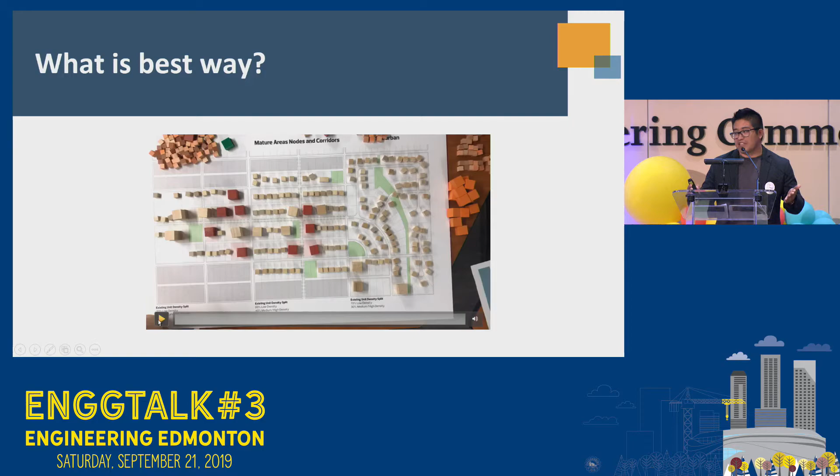And if you can play the video. So we gave people a board, we had them see that current state that I showed you, and then we asked them, how would you build your city? This is a time lapse, it's pretty quick - they looked at it at the beginning and then they took everything off and just built their own city.

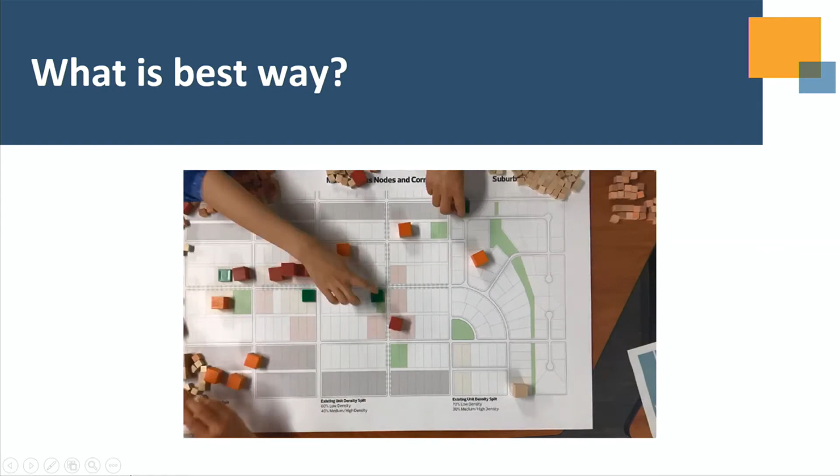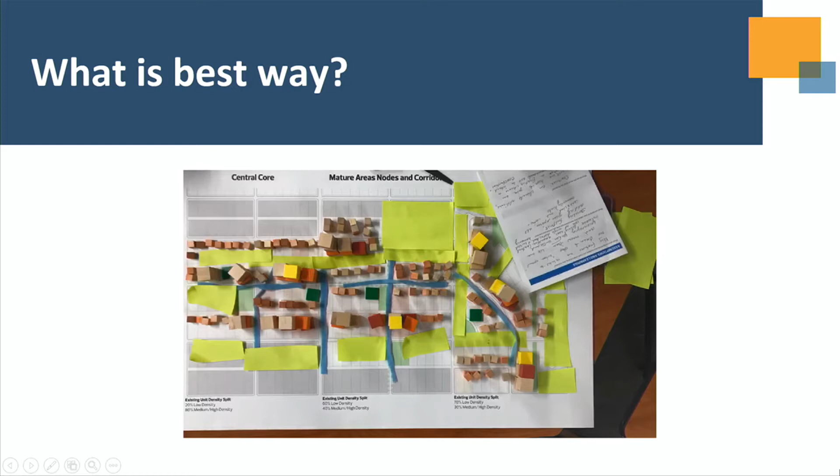So that's actually very telling, and it hits home the point that I want to talk about - everybody has an opinion on how to build a great city. There actually is no one correct way to build it. It's not a Goldilocks problem where you have a few options and want to pick the one that's just right. Cities have been described as a problem in organized complexity. Now what that means is cities are too complex to engineer perfectly. There is no one right way to build a city. However, as engineers, that shouldn't mean we don't try to understand them.

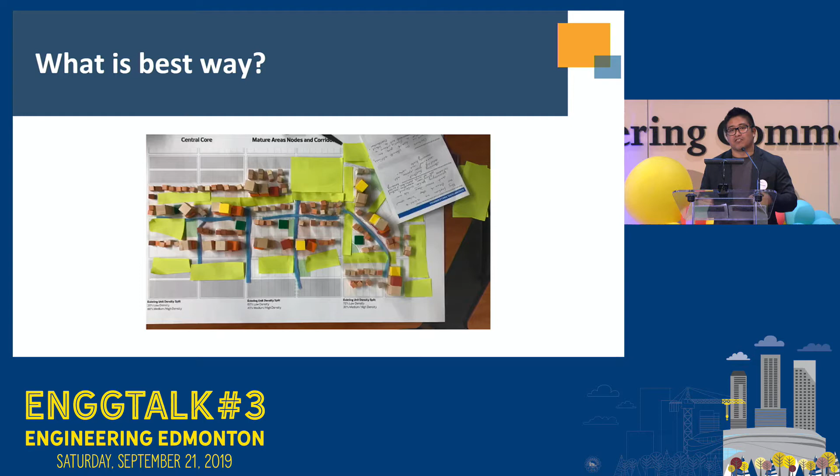So that's exactly what we did. We modeled each of the scenarios that I just showed you - the current state, the business as usual, the center city, node city, corridor city - to try to get all these benefits and see what we can keep. Because the only thing we can do is actually learn, get some learnings that we can use. And so we use those learnings along with our professional judgment - there's a reason we went to school - our public engagement, and other technical reports we did to come up with a preferred scenario. So it's not the scenario, it's a preferred scenario that we think is good for Edmonton.

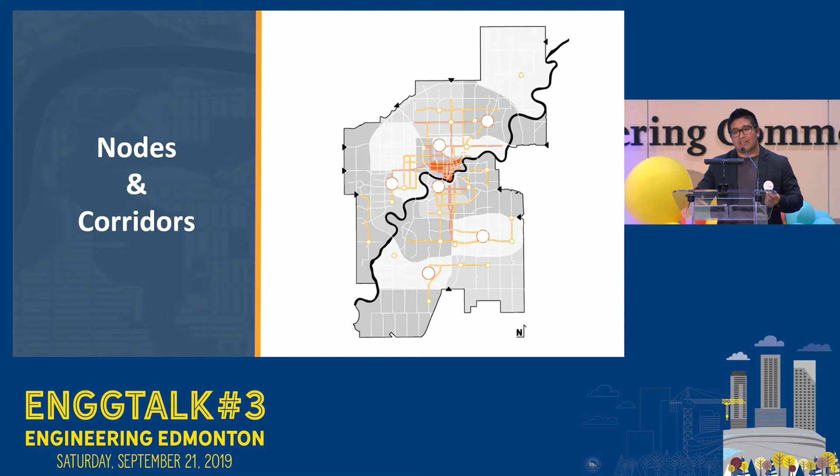And so this is a result, our land use development plan that shows a network of nodes and corridors. The nodes are shown by circles, corridors by lines. We have a strong central core which expanded to include other neighborhoods because we know we can get some good benefits from that. By having that network of nodes and corridors, we can have a much more efficient mass transit network. You don't have to bring everything downtown through LRT. You can have people going to different parts of the city and use a similar service or frequency, and more importantly, reliability for people to get around.

And you can also have a green network. Instead of bringing everybody to the river valley, you can provide these green and open spaces in other areas for people to enjoy, so you have that critical mass that makes sense to invest in. Access to these green spaces is good because many research and reports show that being close to these types of spaces is good for the physical and mental health of people. So in the end, what you have is the preferred concept, where our land use, transportation, and green spaces create that integrated city that we believe Edmontonians want to live in.

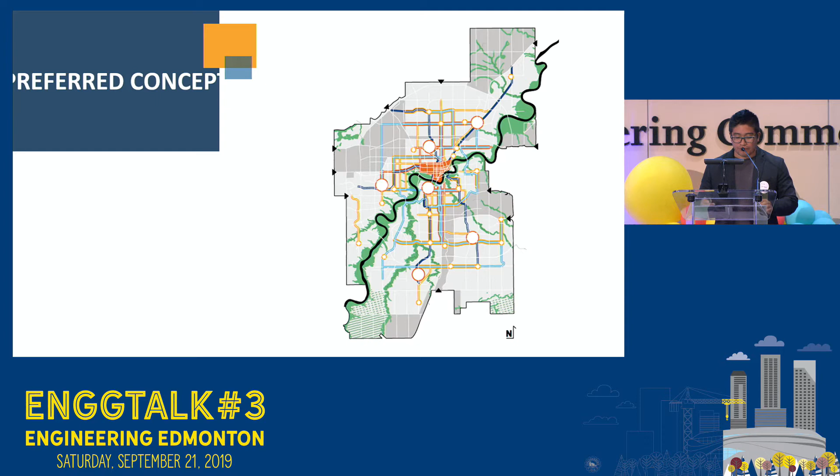But how do we measure these benefits? We do exactly the same thing: we remodeled the city, we modeled the preferred scenario. By doing that, we run it through our regional travel model, which takes where people and jobs are, where we've guessed they could be based on the land use, and we model what their travel behaviors are going to be.

So we can track things like the number of trips people take, number of trips by transit, the length of people's trips, auto trips by kilometers, which we can turn into greenhouse gas emission information, how many households, how many cars households have, how many jobs are close to people depending on their age, income, gender, household size. So we can get a lot of information.

We can also get very creative. So what we showed here is trip destinations, where trips are ending up, where people want to go. You can see they start to cluster in some areas. So I told our modeling engineer, why don't we lay over our nodes and corridors patterns? And that's exactly what we did. You can see those areas start to cluster in those nodes and corridors in the downtown. So we're actually predicting this is where people are wanting to go. We can get some good benefits out of that, some good learnings, some good benefits that we can tell to people and explain to them.

I could talk about the results all night long. They're actually online if you want to check them out. But we really have to pick up the big learnings so that we can communicate it to people, and especially council, who has to approve this in the end.

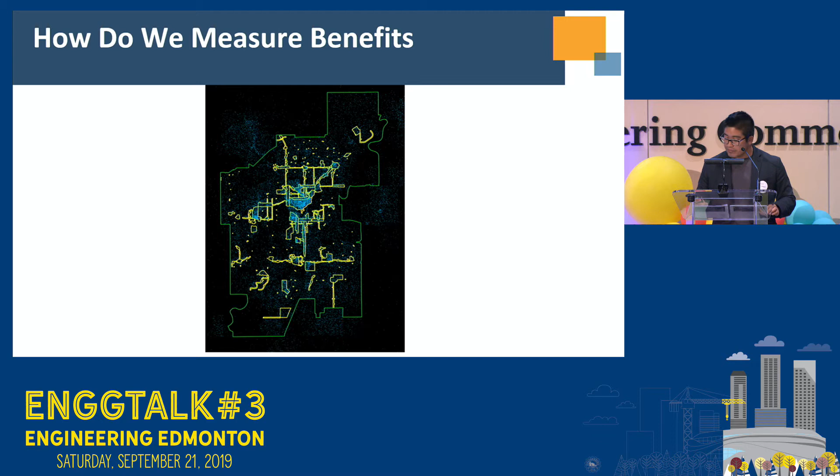So we got some expected results that we feel are very important to communicate. First of all, we saved more than 5,000 hectares of land from development. As you saw in the first case where we did business as usual, we literally had to go outside the border, get more land, annex more land. By going a different way, we're able to save that amount of land from development, which is a much more efficient way to run your city.

We actively support redevelopment to enable more than 50% of the people living in already established areas. Why is that important? Because in established areas, we already have infrastructure, we have services, so we just bring people to reuse the services. We don't have to build anything new, and it's much more efficient that way. In the suburbs, we'll always have to build these services, but if we can get the majority of the people inside established areas, it's a lot easier and more efficient to provide that as a city.

And then we increase the number of daily walking, cycling, and public transit trips by 50%. Again, by placing people and jobs together, by dispersing travel patterns and shortening trips, we can allow more use of biking, walking, cycling, scootering. So we can influence people's travel behavior and try to get them out of their cars, or at least not so dependent on their cars, and give them options to travel in other ways.

So how do we make that city happen? Well, we have to write policy for it. We start off at the top: one guiding principle, four strategic goals, six guiding values, 24 city building outcomes, five big city moves, 70 intentions, 350 directions. So it's a lot of work. It's not easy to come up with a city like that.

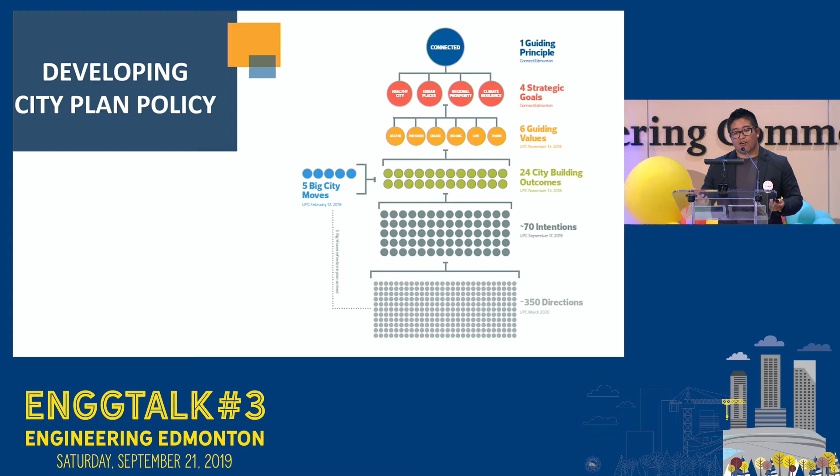I don't know how I'm doing for time, but I'm going to go through this last slide quickly. Throughout the modeling and creation of this policy, we always had this question in mind: what future city are we building together?

We took a lot of engagement information that we had and fed it through an AI program. It gave us common themes, which we then took to the public to confirm, and we came up with some of the things they want us to do. So I'm going to share them with you.

First of all, they want to belong. No matter how they identify inside, what they look like outside, they want to be able to belong here and thrive as a city.

They want to live in a place that feels like home. They want to call this place home, invite people here, and be proud of this home. Ideally, they would like people to come here and also call this place home.

They want to thrive. We really need to provide a city where they have the ability to use their minds and abilities to thrive and be personally successful, because that ultimately helps the city to be successful.

They want access. Access to parks, to recreation areas, to jobs. So we have to provide that. And they want different types of access, not just be dependent on one mode.

They want to preserve. They want to preserve their history, their culture, the cultures of people who were here before us, and natural areas. They want to hold on to things that are important as we continue to grow to 2 million people.